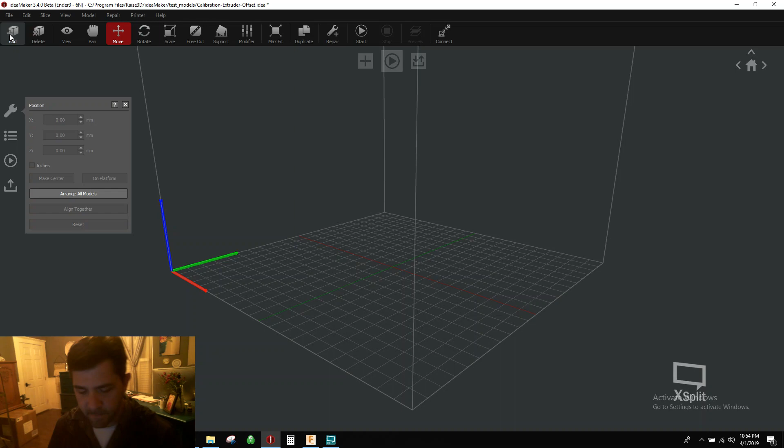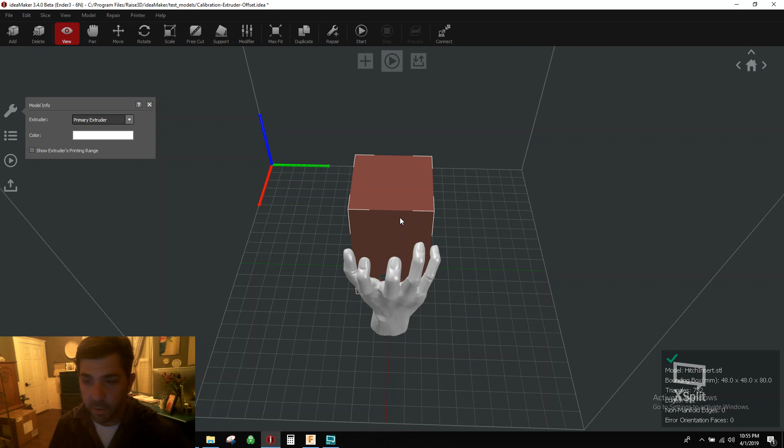So we're going to do a little custom hitch cover for my truck. So we're going to bring in two model files, which I already have out here on my desktop. So I'm just holding control and selecting both of the ones I know I'm going to bring in. So here we go. We have a zombie hand, and then we have this generic little hitch insert that I did in Fusion, and I made it generic so that I could stick it to the back of whatever model I want, and I can have a whole stupid collection of hitch covers for my truck.

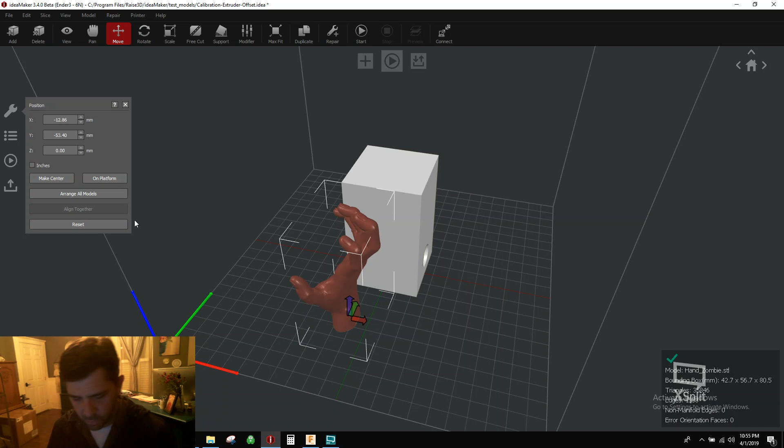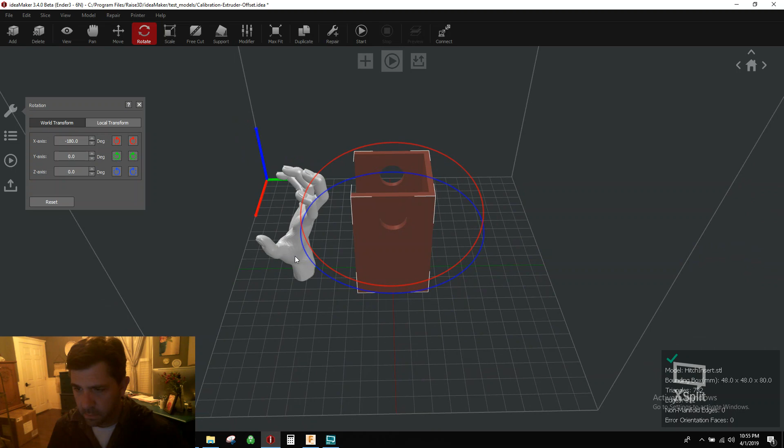So first thing we need to do is orient these parts correctly, and so I'm going to pick the hand first. I'm going to go to the move icon. I'm going to center him or her, whatever it is, and then I'm going to go ahead and Control Z, and then I'm just going to move it straight forward to keep it center on the line, and then I'm going to rotate so that the hand is facing forward, and now I'm going to orient this guy or girl, whatever, so that it is oriented in the correct way. So there we go. They're lined up.

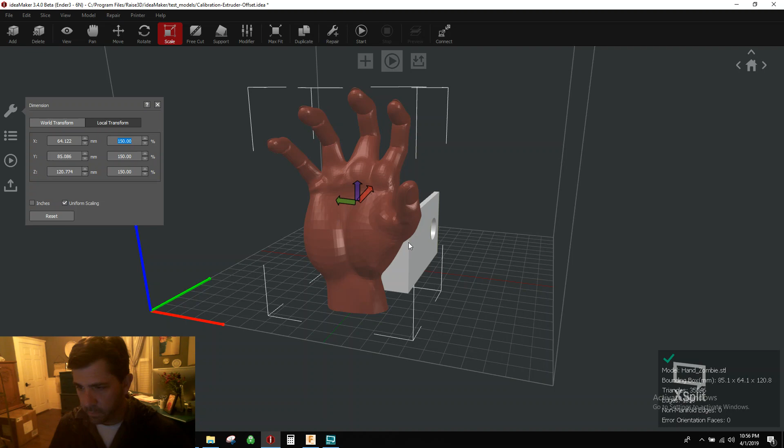This is the front part of the hitch that sticks out. This is the part that goes inside the truck. I know that because I designed it. But the hand is a little small. That's too small. So I'm going to scale the hand up to about 150%. That looks good. And now I'm going to go ahead and do a move on the hand just to get everything sort of oriented together here.

So I'm going to go ahead and overlap these. I'm going to just do a little bit of alignment here. And so now I've got these things close together and actually overlapping. But just because they're overlapped does not mean that they're one solid part. You just have two models super close together. Now, technically you can print it like this, but ideaMaker is going to try and print two models really close together, and not really print them as one file. So ultimately what you have is just a weak part that's going to break.

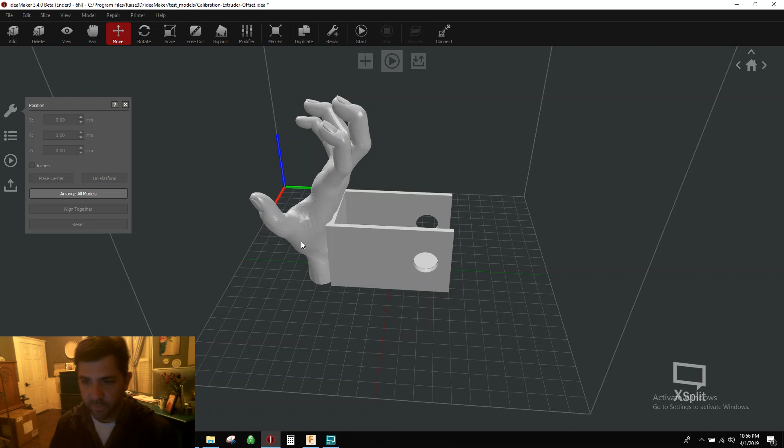So the way you merge them is fairly simple. You pick one, and then you hold your shift key and you pick the other one. You go over here to model and you say merge selected models. And so there you go. Now I have one bounding box around both parts. It's not two separate parts. It is one part. And then from right here, if all you want to do is merge them and export it off to something else, you're done.

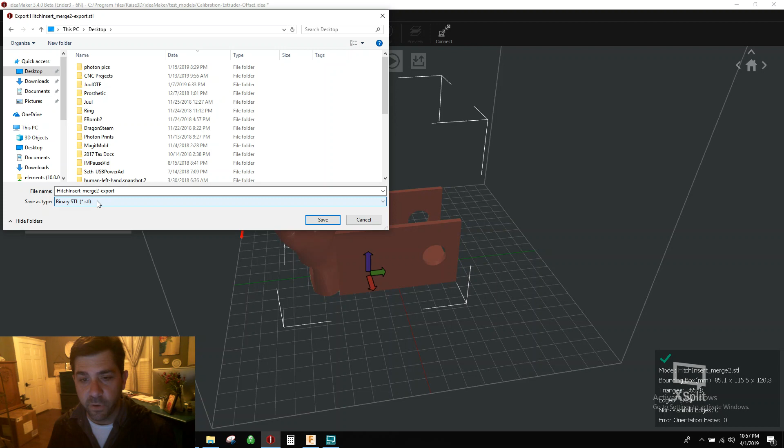Go to File, go to Export, pick where you want to save it. You can do it as an STL file, an OBJ, a 3MF, whatever you want to do, and name it whatever. Now, if you're going to print this, then here's what you need to take into consideration. So let's go to pick whatever your standard slicing template is. Doesn't matter. Make a new one if you want.

Go to your Advanced and go to Other. You want to make sure this merge open segments and merge internal overlapping parts are checked. Because even though you've now merged them together and they are technically one file, if you don't select those parts of the model file that are merged and overlapping, it's just still going to print them as overlapping. It's not really going to merge them together in a cohesive print, so to speak.

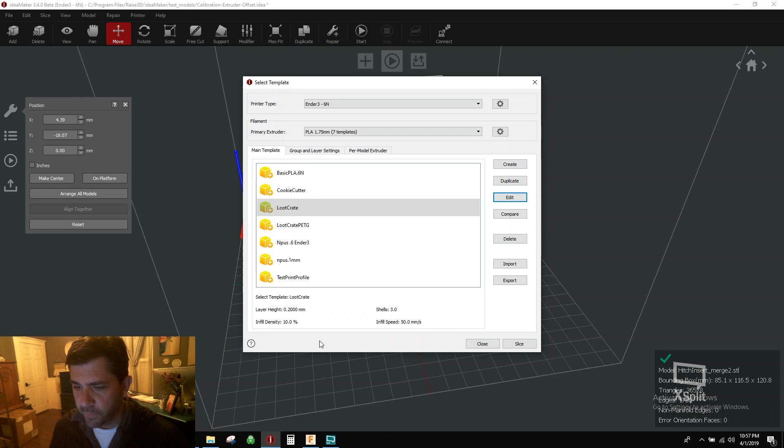So why don't I uncheck these and I'll show you what I mean. So I'm going to uncheck these for now. Let's go to the preview. Always check the preview. Preview, preview, preview. And we'll see what's happening here. So let's orient this back over this way. So you can already kind of see that it's got some weirdness going on here.

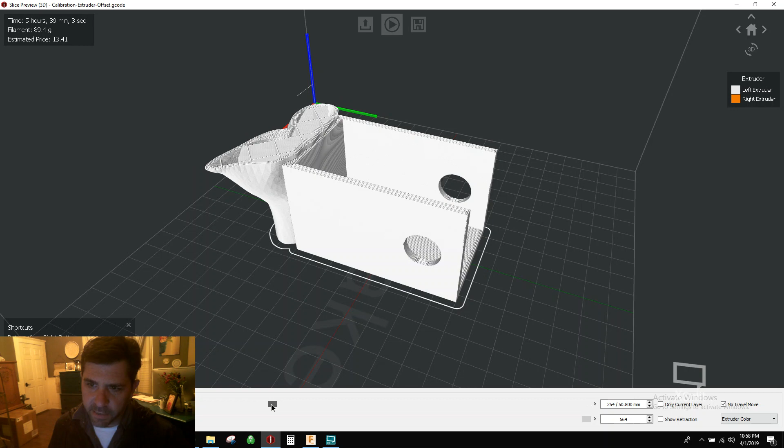The back of the, it's matching the contour of the hand, which really should be kind of together. And you can kind of tell because of these lines here, the way they outline, the way the walls are being printed here, something's a little off. So if you scroll down and you get to that part of the slice, you can see that I really have two separate sets of walls. And it is not printing that stuff together. Right there is a decent bond,

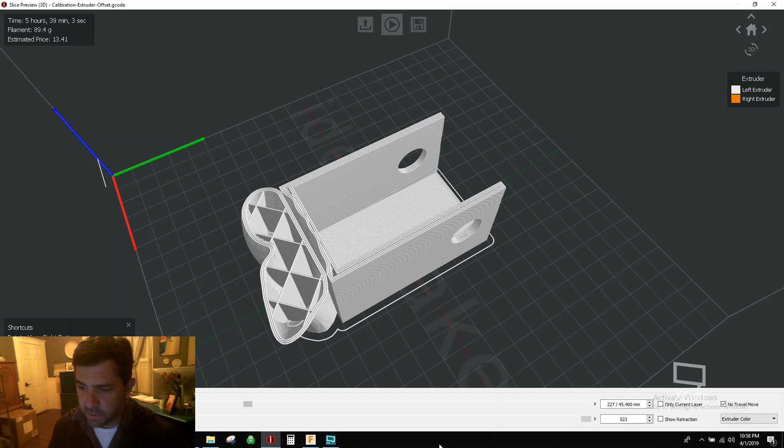but as you come down, you can tell that there is a significant gap between the models here. And so ultimately it's a very loose connection. It'll print just fine, but it won't hold up to any sort of bumping around or stress. It'll break. And even so, you can see a big gap there. And even the first couple layers, these are just barely touching. So not the optimal thing. So we want to make sure we've got those two boxes checked.

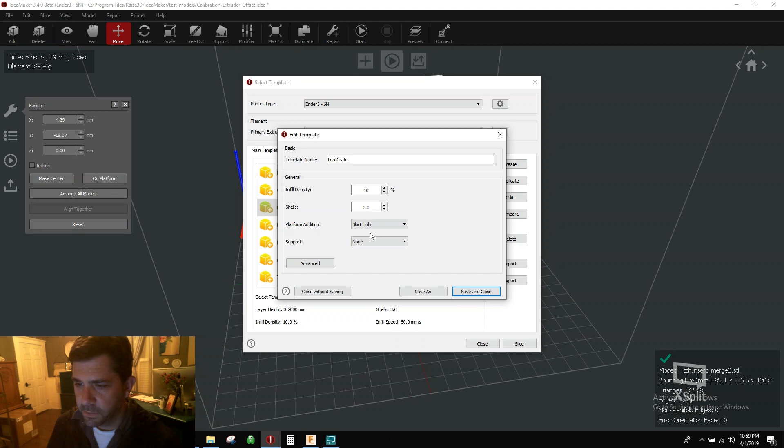Let's go back. Go to Edit, go to Advanced, go to the Other tab, Merge Open Segments, Merge Internal Overlapping Parts, hit OK. Let's reslice. You'll notice a little bit of a difference from a print time perspective. I think this said 539 and now it says 519. So not a huge improvement, but it's doing that because there's actually less movement now of the print head, less retractions, it's printing less walls, it's printing more of a solid wall around the whole part, which is what you really want to make it strong.

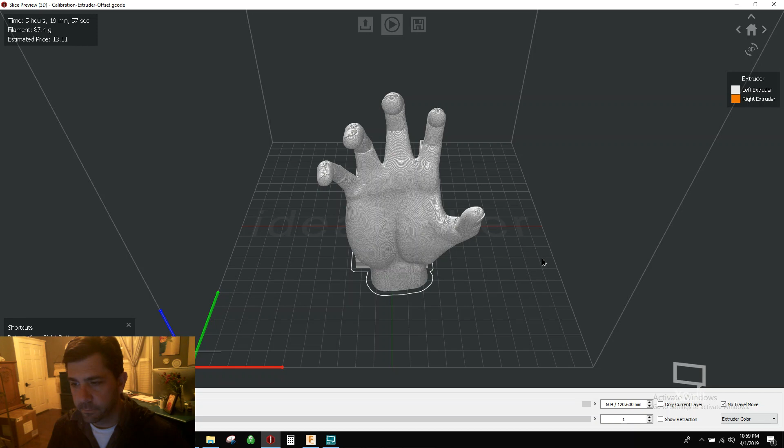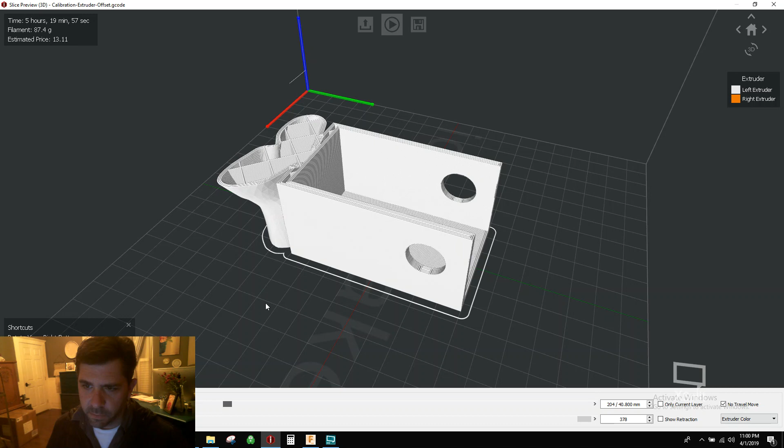So let's check the preview one more time. Let's move this around, and you can tell already that while it's still following the contour of the hand, there's a good amount of top fill here. It's seeing this as a top layer, which is good. It's what you want. So if we come down to that part and into the hand itself, you can see now we've got one solid part connected with infill, crossing through the whole thing.

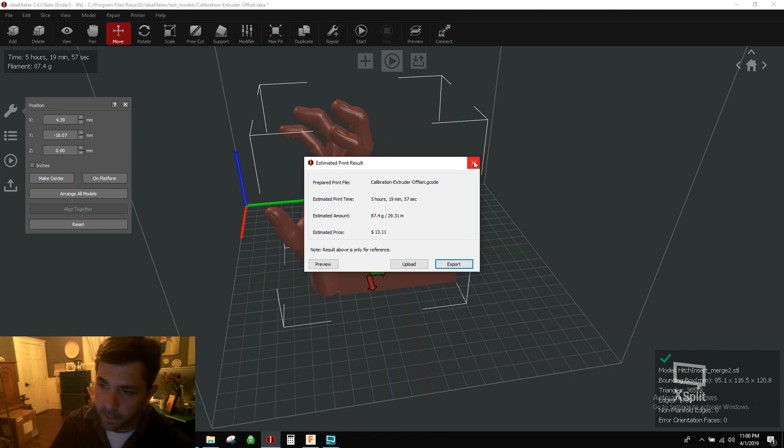You've got the wall going around the hitch insert and around the hand itself. And all the way down here at the bottom, there is no gap. It is all one solid part. So there you go. So it's a cool little feature that is built in, free to use, all that good stuff, super easy. So there you go. There's your quick tip for the night.